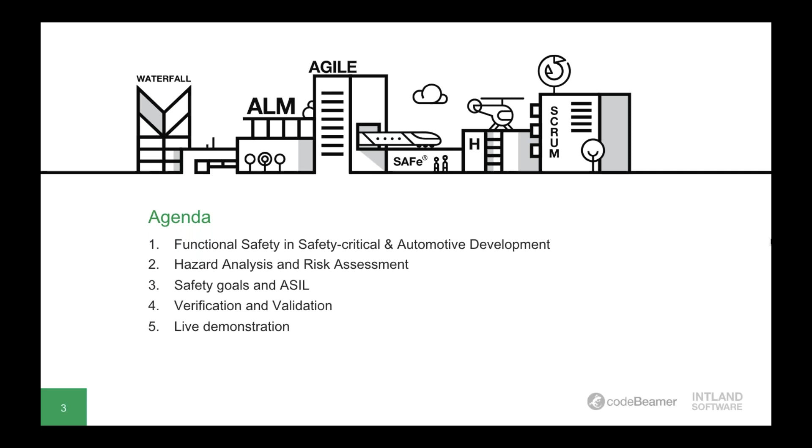We'll also touch on the topic of safety goals and ASIL values, and we'll cover the difference between verification and validation, but not much more on that topic because it's going to be covered more extensively in our upcoming webinars. And after all this, Adela will show us how application lifecycle management can help carry out hazard analysis and risk assessment in practice.

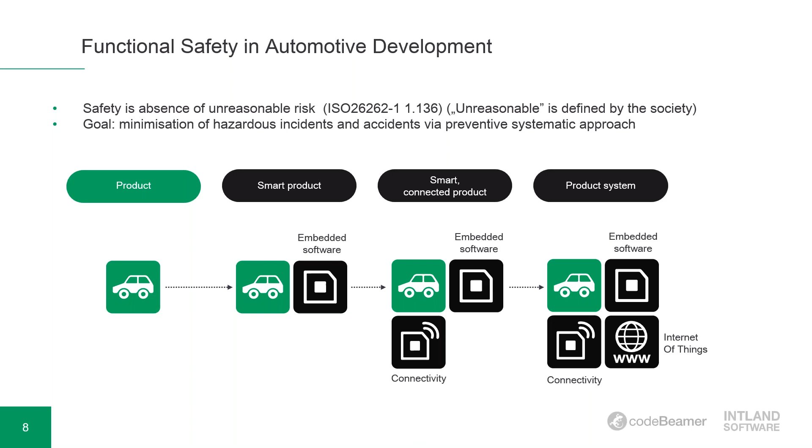Today, we all know that vehicles are getting more complex and they are starting to be connected. We are talking about smart products, Internet of Things, it's all coming together. So I know that the conventional ISO is really focusing on conventional items, and today it's not so straightforward just to sit down and define what my item is doing, which is the first step to perform a hazard analysis.

Okay, then just shortly some definitions and about the methodology. So the hazard analysis is a method to identify and categorize hazardous events that are caused by some malfunction of an item. And at the end of the day, we want to avoid unreasonable risk, right? A hazard is a potential source of harm to a person, and it's caused by the malfunction of the item. Typically, we're talking about E/E, so electric failure, but I will talk about that a little bit later.

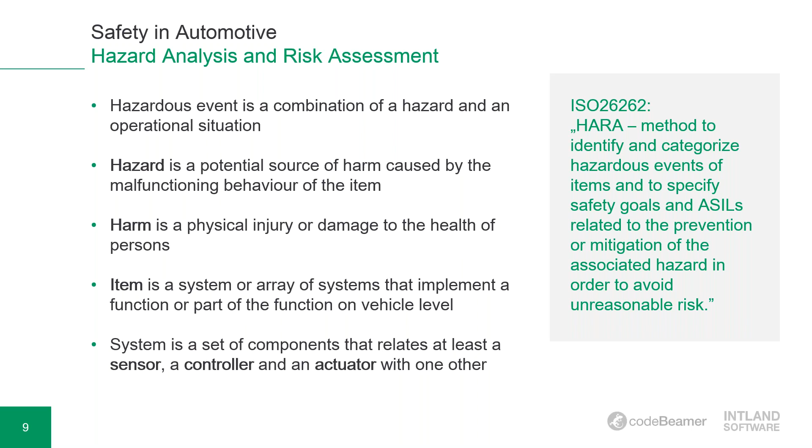And just one more important definition about the item, which is changing nowadays. Typically, when we are thinking about an item, we should think about a system, or a functionality we want to analyze. And normally, it should consist at least of a sensor, a controller, and an actuator that are interacting with each other. These functions are today getting more and more complex. So I know that lots of companies have issues with how to define the boundaries of the analysis.

But basically, what you want to do is to understand the boundaries of your item, so of the system that you are developing. And when you did that, then you can actually perform the hazard analysis and risk assessment, where you will define your ASILs. And from that, you will derive your safety goals and additional information you will need to have your first functional safety concept. But that will be the topic of next webinars. I just listed it here because it's kind of joint definitions in ISO 26262 in the concept phase.

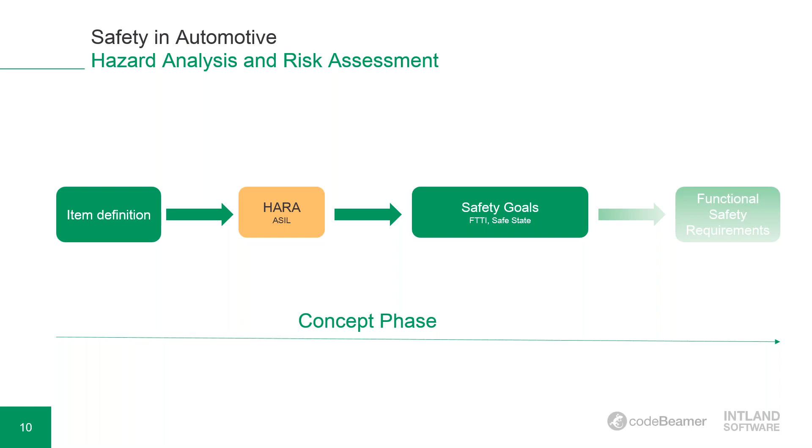So as I said, first of all, you want to understand your product. It maybe sounds simple, but you really need to define your item. So you have to know what its purpose is, of course, and you want to focus on functional and non-functional requirements. If you already have some knowledge from previous projects, then you should list already the safety requirements that could help you in the further analysis.

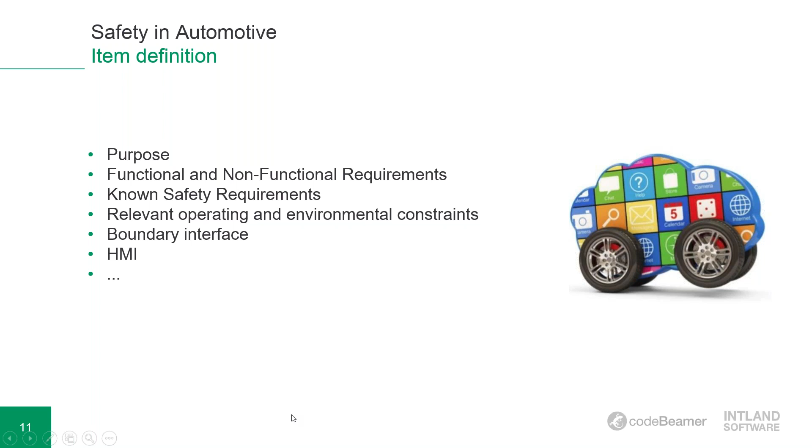You should know your operating and environmental constraints. They will, of course, have an impact on your functionality and also on the functional failures. You want to understand your boundary interfaces and, if relevant, human-machine interface, etc. So once you understood what you want to do on high level, you will take your high-level functional requirements.

So I always say it's just a very simple statement. So, for example, if you are developing a braking system or a steering system, then you just want the system to brake or to steer when and how you want it. And now you want to find your hazards, so your functional failures.

Of course, you can use your previous experience and checklists, but if you're doing it from scratch, which could be typical for some companies today that are focusing more on developing self-driving cars and high-level ADAS functions, etc., you can just start from zero and use the typical guide words that are also used in other areas, such as FMEA or HAZOP.

So you just take the guide words and start to modify your required intended functionality and see what you come up with. You will have quite a big list, and you will see immediately that some of the deviations could be merged. And you should do that because you don't want to work with too many functional failures further on.

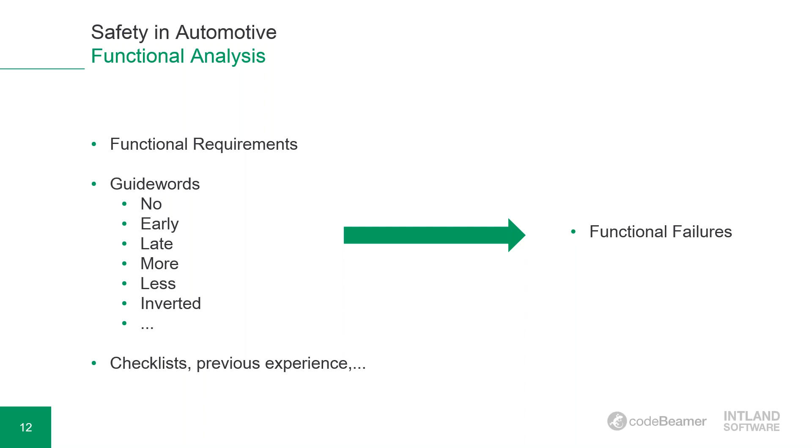Here, what I want to highlight is that even if ISO 26262 is focusing on E/E malfunctioning of an item, when you are performing a hazard analysis, you want to focus also on other technologies that are in it. You will formulate a safety goal from that, but you will not use it further during the development in accordance with ISO 26262 because they are not relevant to ISO. You simply have to take care of those high-level safety requirements in other technologies, using other standards.

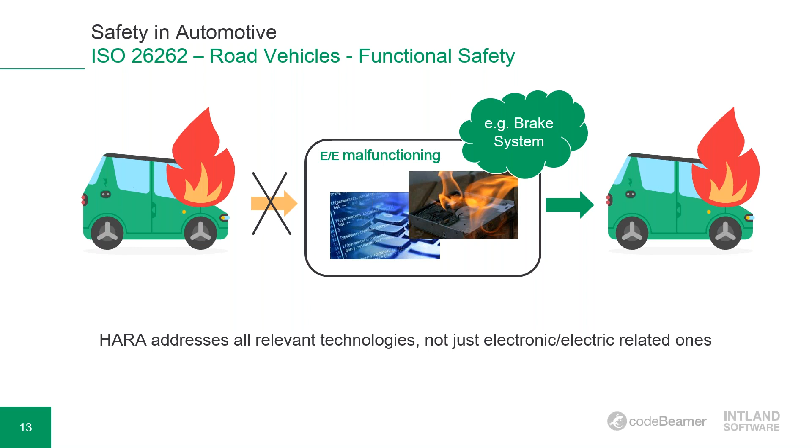Okay, so now we know our function, now we know our functional failure. In hazard analysis, what we're doing is putting these functional failures into a context, checking how this failure will behave in a variety of situations. It's really up to you, up to the company, how you will manage these situations and how you will group them.

But typically, you can use some vehicle states or driver's actions that are more relevant to the vehicle. So you have engine on/off, or the vehicle is accelerating, decelerating, etc. But you can also use maneuvers, driving situations like overtaking, turning in a city, parking, or sometimes an evasive maneuver, etc. So you can combine these and go further on.

You can add environmental conditions, and you can define some road surface. Of course there are items where lots of these listed attributes are not important, but in other items they could be really relevant. So it's really necessary to have good engineering judgment and to use previous experience if possible, to list all the relevant situations and not the non-relevant ones, because you will end up with a huge analysis document at the end.

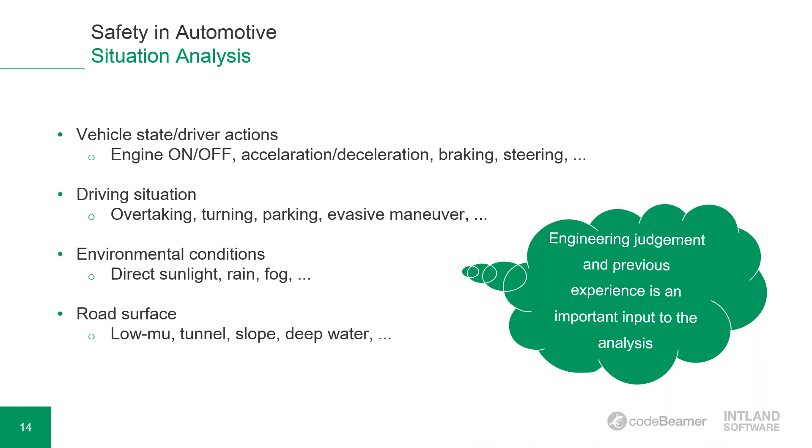Okay. So what you're doing is very simple. You take the relevant situation you are working with, you take your functional failure, so the hazard, and start to evaluate the two. You evaluate the severity, the exposure, and the controllability. These are, of course, given in ISO. I know that lots of companies have issues with this analysis, because even if there are tables, it's quite subjective. So it should be done in groups, and as I said, previous experience could help a lot.

Based on the tables, you will determine your ASIL for each situation, if you were not able to group some of the situations already in the beginning, just not to have too many combinations. And of course, later on, when you have the relevant hazardous situations, you will start to define your fault tolerant time interval. But I will talk about that in a minute.

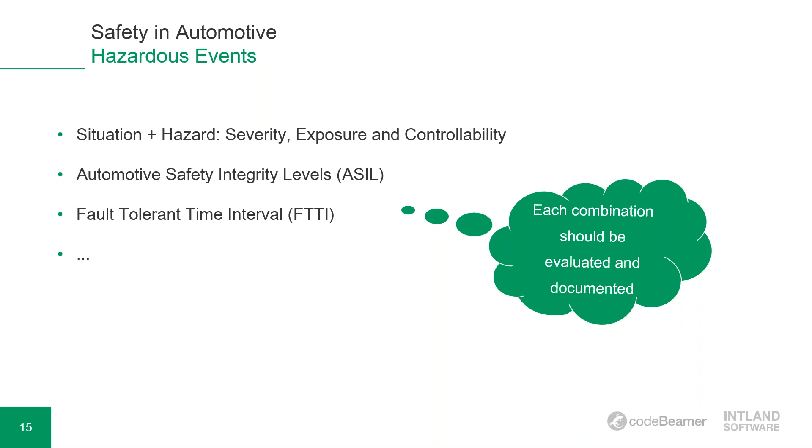What I want to highlight is that, of course, we are talking about high-level requirements and high-level analysis, but you should know that a fault causing these deviations always happens on a low level. There is a hardware part, a conductor, a resistor, something that failed, and it will cause a functional failure that will propagate or not. If it propagates to the boundaries of the vehicle, then we can talk about a hazardous situation.

It's done this way because there is a human factor, a driver that will basically evaluate the situation. In the tables given in ISO, the controllability part is really connected to the driver, the user of the vehicle. So this is why there's a small difference between the low-level functional failure and what we are analyzing on this high level.

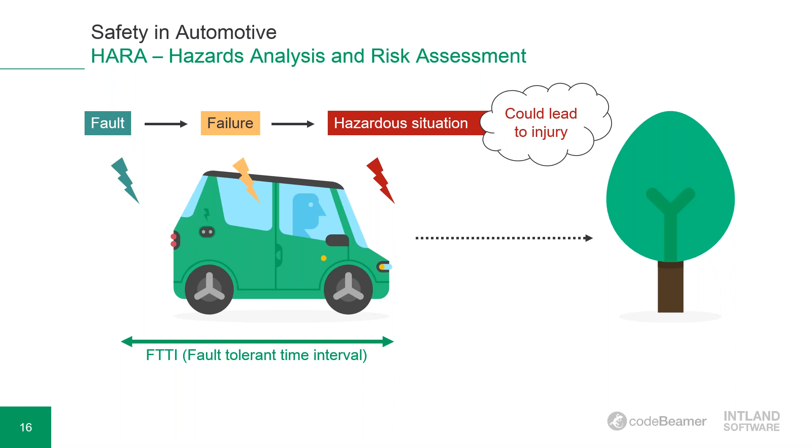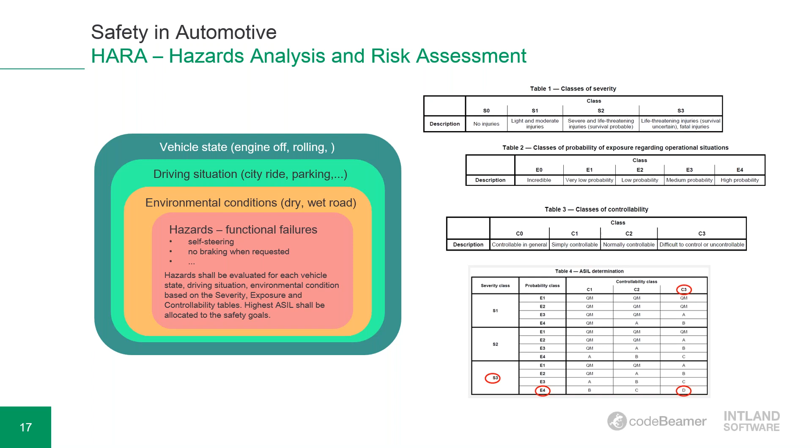Okay, so just a short summary. As I said, you take the hazard as a functional failure, you should have very few, and then you combine them with all the situations you think might be relevant. You take the tables from ISO 26262, and you determine your ASIL for each. So when you have the hazard in one particular situation listed here, you formulate a safety goal from it.

So now, shortly, what the ASIL means. I'm quite sure that every one of you knows it, but plainly said, it's simply a list of activities that you have to perform to avoid unreasonable risk. It's by definition. But the point is that once you determine the ASIL of the hazard, it will be inherited by the safety goal, and it should be inherited down to the atomic requirement level if the ASIL is not decomposed later on in the analysis, but that's another topic. Okay.

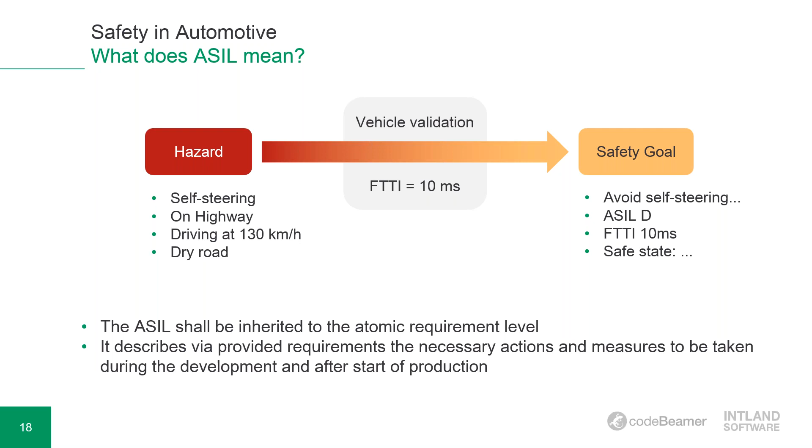So safety goals, you don't want to have too many safety goals. I'm repeating myself, but it's really important because one additional safety goal can really increase dramatically your development in the later phases. So one hazard defines one safety goal, you will attach the ASIL and the fault tolerant time interval. And what's important is that you have to define your safe state, your degraded mode, some emergency operation, anything that could be relevant for your functional safety concept later on.

Since the safety goals are actually high-level functional requirements, they should be managed according to requirements engineering, and it's also described in ISO 26262. So what attributes should be added and what the context should be, it's also given in ISO.

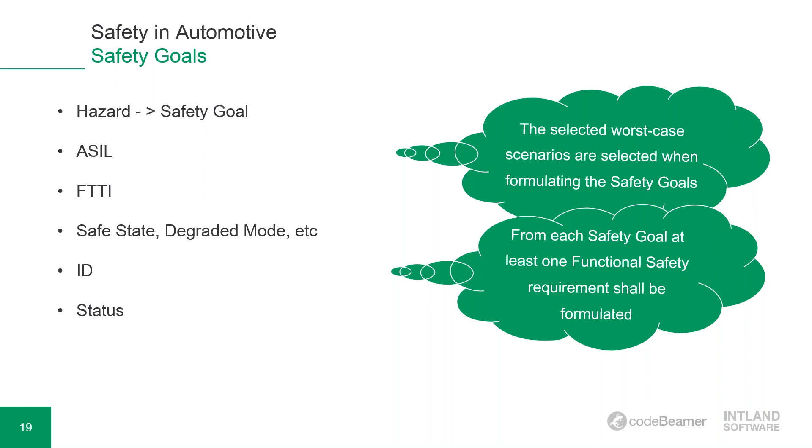Okay, what I would like just as a final thought to say here is that, of course, the hazard analysis should be verified, right? It can be checked if it is complete, if it was done in accordance with some internal guidelines or in accordance with ISO 26262. But if it is correct, then we have to validate it. So we are validating the safety goals.

It means that most likely you will have to sit in a vehicle and perform some fault injection tests and see if you really covered and had proper assumptions on the safety goals you will work on further on. The same goes for the determination of the fault tolerant time interval.

Okay, so this was the introduction. Now, before we go to Codebeamer, I would like to ask you 2 more questions, if possible. Okay. Okay, thank you very much. And just one more question. Right, okay, thank you so much.

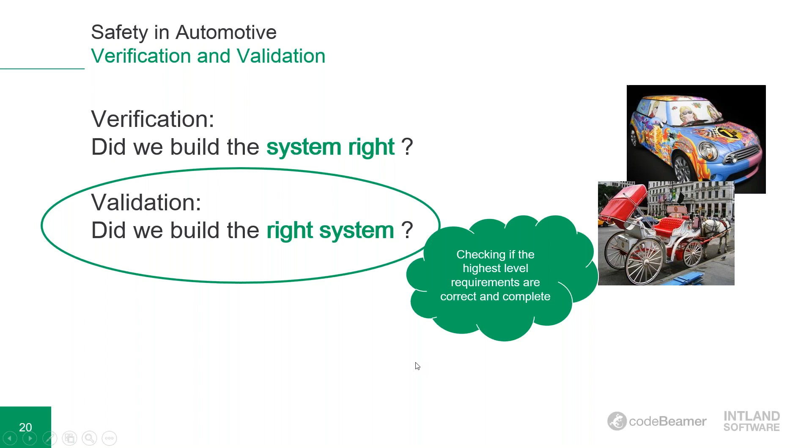Now I will switch to Codebeamer. So here I would like to show you shortly what you can do, how you can use it. Of course, as we heard, there are templates that can guide you, but just keep in mind that it's a very flexible tool as well. So you can use it really in a variety of ways. What's very good is that you have an integrated wiki page where you can actually collect your thoughts. We loaded here some information from ISO.

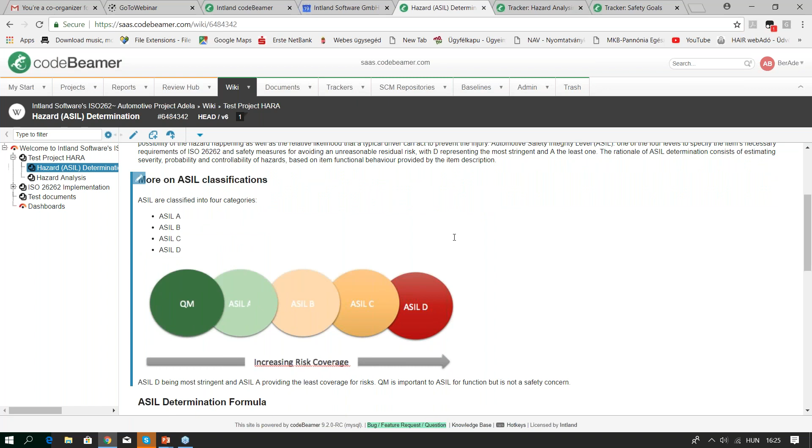If you're performing this analysis, you can check for any necessary information, just to check if you had the proper ASIL, and we also included the tables from ISO. As I said, this is just information that you can extend in accordance with your internal guidelines or experience within the company.

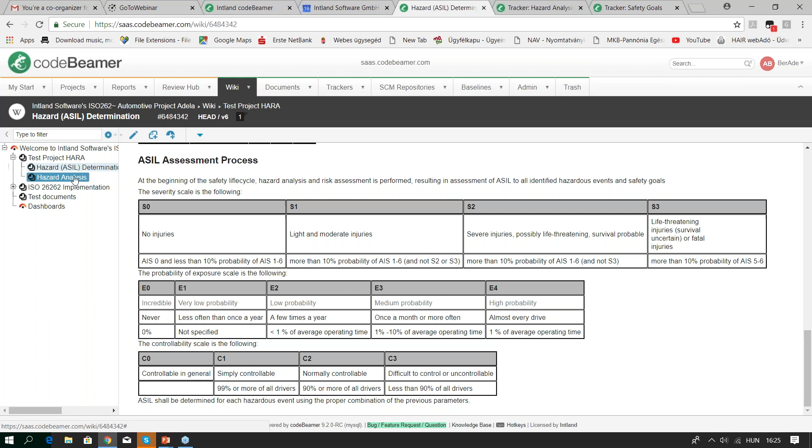There will be, of course, situations that are not relevant, not applicable. But if you are doing this for the first time, normally it is good if you document all your thoughts and just say that these combinations are merged, or this combination is not applicable, etc. So you don't repeat yourself if you go back in other projects to the same analysis. All relevant combinations will then be evaluated based on the table. So you will provide the severity, exposure, and controllability attributes that will then define your ASIL.

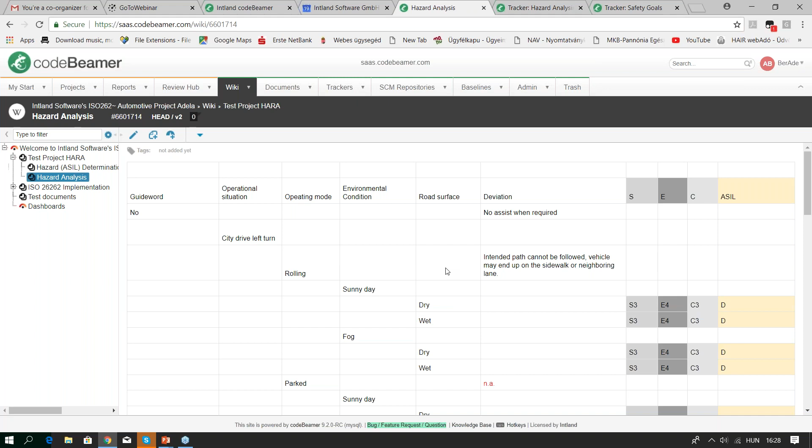Okay, so when you have this table that can be really big, then, as I said, you want to merge the necessary information and come up with some really relevant combinations, which you will manage later on. Of course, you can manage all in the trackers, where you will be able to write down your relevant information and change your parameters. But what is most important is that these are living items that you can connect. So whatever you have here, you will be able to connect to any test case further on, or to the safety goals, etc. So this will be part of your requirements management.

So for example, you can just have an overview about what you are doing. It can also be written in a very detailed way. You can have these details in a wiki page, as you wish. But once you collected one hazardous situation that you think is relevant, you see that you can change here, define the type. So we can say that it's, for example, safety analysis.

If you want, you will be able to change that. It's really quite a flexible tool, but it is a proposal we are giving as a starting point. Then you can here change your guide word, your operational situation, anything that you might list. So this list can be extended, and also these fields could be extended. So if you have another methodology in your company, then it can be really adjusted to that.

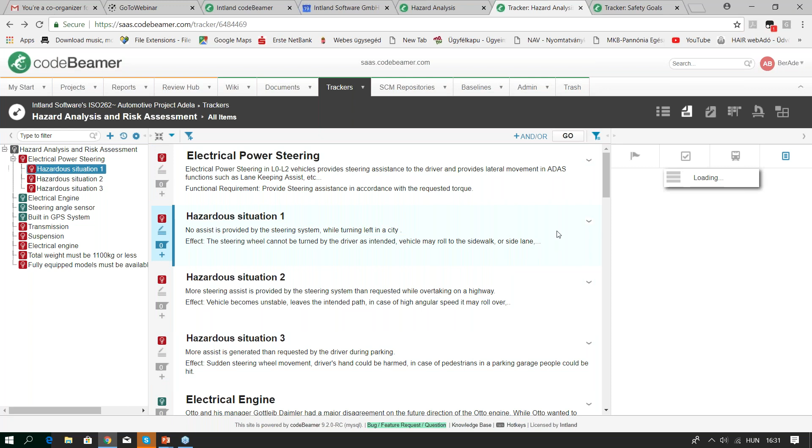Once you have your relevant hazards, as I said, you then want to define your safety goals. You have a separate tracker for it. Of course, as I said, safety goals will have different attributes that you can change. So you can put the ASIL here, which should be inherited. So the first question is why is it not inherited?

The point is that these templates could be used by different companies. Some companies will typically receive these requirements, so they will have to be able to simply write those down and change the ASIL. You can define here the safe state and the operating mode, so the state your system is in. And of course, you can change all of it and adjust to your concept and your internal processes.

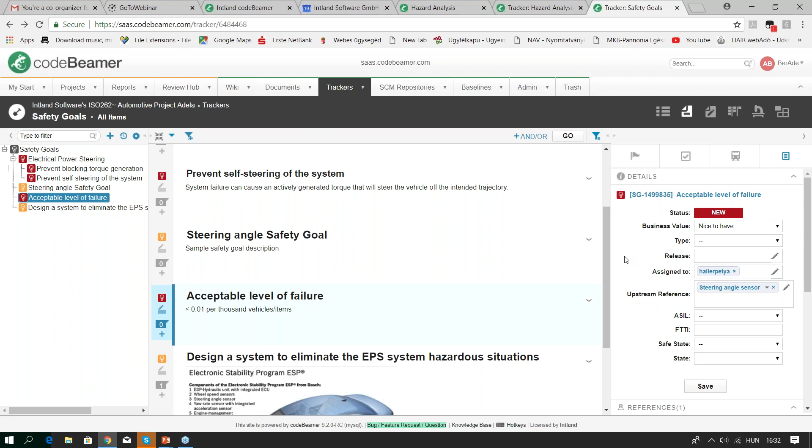Of course, the architecture is the same, so the engine behind, if you go into the details, you will be able to see the history of it, and you will be able to define any other attributes that are necessary for your process. The template defines it by itself, but I want to highlight that it can be configured to your needs.

What is, of course, relevant is that in any requirements engineering, requirements should be linked. So you have to see what are the upstream and downstream references to your requirements, because you will further derive them down to functional safety requirements, technical safety requirements, etc. And that will be a part of another webinar.

So I see that we are a little bit out of time. So this was shortly how you can use CodeBeamer to manage your requirements and analysis.

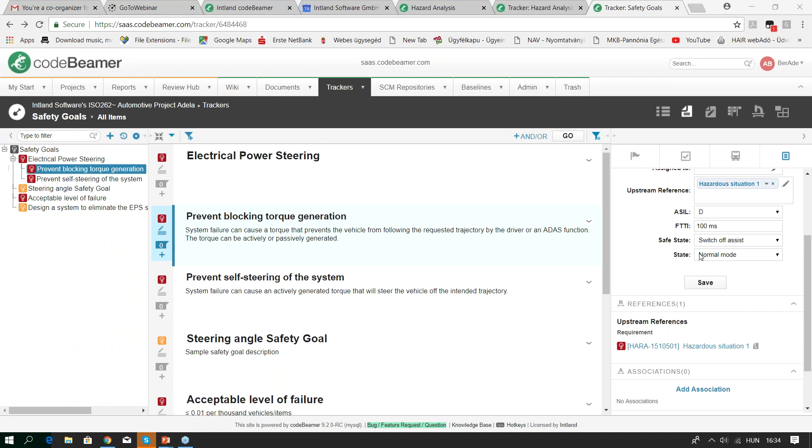The user is asking, can I use this tool for different standards? Well, if you're asking in the context of automotive development, but even if you're not, the answer is yes. So the first part of my answer is the template, Intland's automotive template, supports compliance with ISO 26262, but also ASPICE and a variety of other automotive standards.

But also, Intland offers pre-configured templates for the medical industry, pharmaceutical industry, and the aviation industry, which all come with pre-configured templates, workflows, etc., that help you comply with the relevant regulations in those industries. So the answer is yes.

Okay, there is one question: can the HARA attributes be changed, modified? So yes, as I said, you can adjust it to your needs. This is just an example that could cover lots of situations, but of course, it's quite easy to add additional fields and extend the content of these fields.